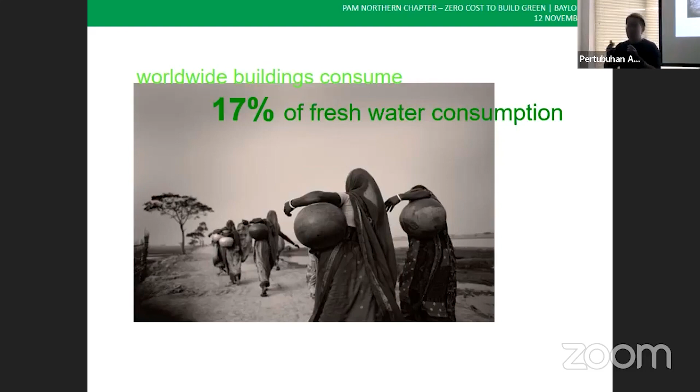Because worldwide, building itself consumes 17% of the fresh water worldwide, and it keeps continuing to increase. So that is the real fact. Continuing with that, 25%—that means a quarter of worldwide deforestation—is happening all over the world, including our country, okay?

During the WAD Architects Arena, he showed us the facts that the whole country, the government of Malaysia, we promised and we committed to protect the entire country's land, to reserve more than 50%, not less than 50%, forest reserve all over the nation. But the statistics show us that we are now actually somewhere around 50-something percent forest reserve, and it seems like it keeps dropping.

I don't know what actually you're feeling, but step into the jungle, look at the whole ecosystem—that actually is the source, how to say, the source of the entire ecosystem for the world. That is the fact always saying: if the Amazon forest collapses, that is the end of human civilization on the entire earth.

We need to protect the forest. We need to keep it. But yes or no, when we keep developing, we need materials, and wood actually is one of the major materials, and that is a real fact.

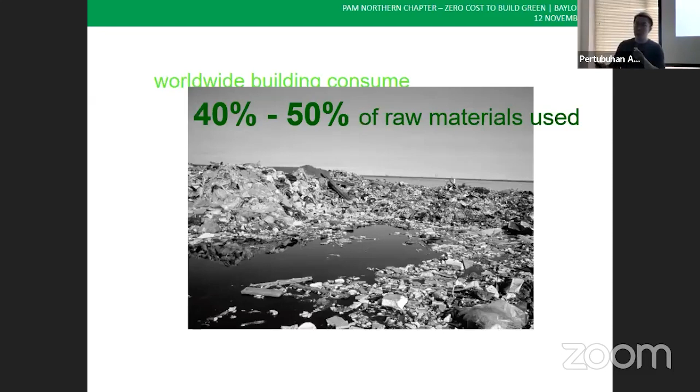Then when we talk about climate change, when we talk about global warming, we are talking about carbon emission. So the relationship between energy and carbon emission is very direct. The higher the energy consumption, the higher the carbon emission released to the atmosphere.

40%, yes, that is a real figure. Don't be surprised. We always talk about energy consumption. Yes, 40% of worldwide energy consumption is consumed by the building sector. That is a big number. That really shocked me.

Think about when we build green. Every single building can reduce half of the energy consumption. That helps reduce the total energy consumption in the whole sector. It's not only cost saving, but it directly contributes to the environment. This is not a small figure. It will touch even 50% of the energy consumption because of the population.

Two days ago I just read a news from the newspaper. In a week's time, the entire global population will hit 8 billion. The population keeps on increasing, and we need development. But how can we actually sustain it longer? That is something we need to think about, and I hope we can think about it seriously.

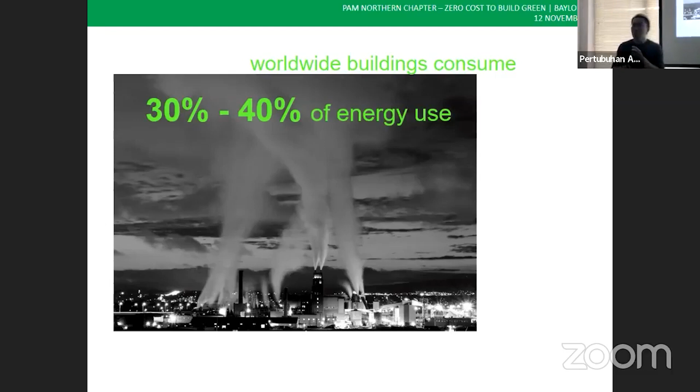40% of the energy consumption, I repeat again, 40% of the energy consumption is consumed by the building industry. And that makes this happen: one-third, 33%, of carbon emissions are contributed by the building industry. We keep having a very wrong perception that carbon emission is mainly because of transportation, driving cars, airplanes flying here and there.

No, don't go so far. Since today we are here talking about building, you and me, we are part of the building industry as professional architects. Try to focus on what's actually showing here on the screen: 33% of the carbon emission is contributed by the building industry.

How beautiful if we can design something green and sustainable to reduce the energy consumption, and that immediately reduces the carbon emission to the atmosphere. The relationship is very direct, as I mentioned. When we design a green building, it immediately reduces the energy consumption, and thus reduces the carbon emission. Whether that 33% keeps increasing or there is hope to decrease it depends on us as designers, the key persons in the building industry, as architects.

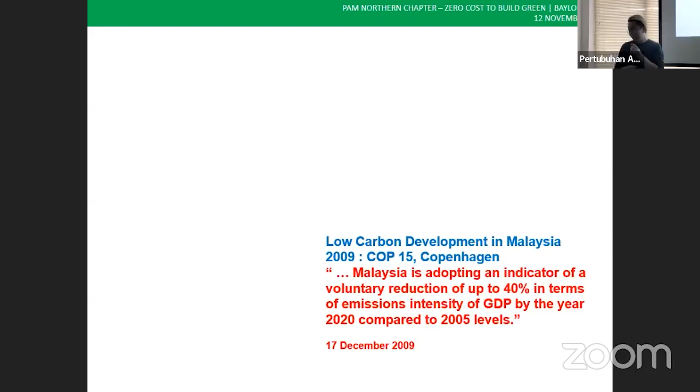Copenhagen 2009, so nice, okay? In Copenhagen, Malaysia, we do commit. We commit that, okay? When you guys look at this, you guys will feel so funny, but we are working hard on that. You and me, we are part of Malaysia trying to reach the goal. 2009 in COP15 Copenhagen, Malaysia adopted and committed to reduce 40% of the emission by 2020.

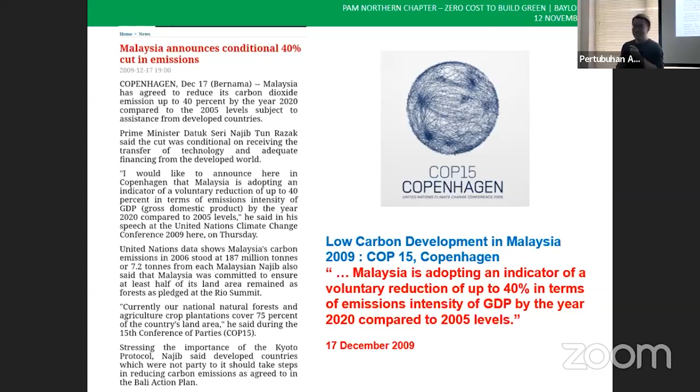So where are we now? 2022, have we achieved this figure, 40% reduction in emission? No. You know why? Because that was 2009, what Malaysia signed and committed to reduce 40% by 2020.

Then in 2015, Paris Agreement happened. Again Malaysia committed - just now it was 40% by 2020, but now in the Paris Agreement, we're going to reduce 45% emission for the whole country by 2030. Am I right? 2030, yeah. So 8 years from now, 45%. That's why I said this is something not only the government, but you and me, every single person, can actually contribute to reductions of the emissions for the whole country.

Try to imagine and think back what I mentioned just now - 33% of the emission actually comes from the building sector. If we can do well in the building sector, we can actually help reduce the emission for the whole country. As I said, temporarily, let's not talk about transportation or industry or other things. Today we are focusing on the green and sustainable development building industry. Let's see how we can do that. So by 2030, our commitment is to a world reduction of 45% emission.

So what actually is the Paris Agreement? It happened in 2016. The whole key point: out of 196 countries signed and committed worldwide for the Paris Agreement, we're going to cap the world temperature not to increase more than 1.5 degrees Celsius. That is the whole key thing for the Paris Agreement - we cap the whole world global temperature not to increase more than 1.5 degrees Celsius.

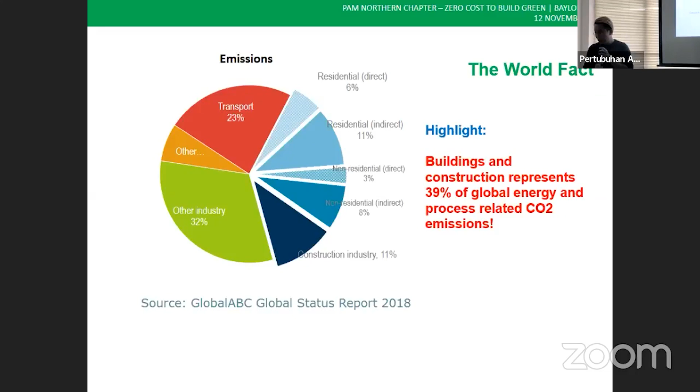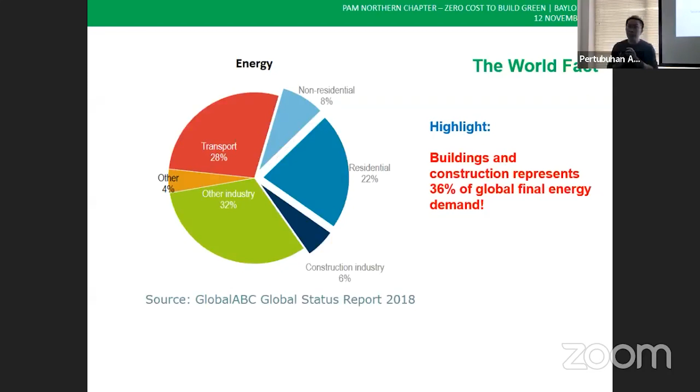So, world facts - again, what I mentioned to you, in more detailed segments and percentage. Building and construction represents 39%. This is the source in 2018 - 39% global energy and carbon emission by the building and construction sector. And building and construction represents 36% of the final energy demand. Just now I mentioned 30 to 40%, so that means it's correct - 36%, the percentage keeps on increasing, consumed by the building industry.

So the relationship, as I mentioned just now, is very, very simple - green building and carbon emission. When we design a green building, one of the main focuses is to reduce energy consumption, and that will in turn reduce the carbon emission to the atmosphere.

Every time I touch this screen, I like to ask my crowd a simple question, or maybe to the younger ones - do you guys know, who actually is the authority or the board having the power to generate electricity for Malaysia? Anybody? Which authority produces electricity in our country?

Yeah, TNB, you are correct, but no prize - thank you for your answer. TNB, yes, TNB for Peninsula Malaysia. Sabah and Sarawak have their own authority - Sabah is Sabah, Sarawak is Sarawak - to generate electricity. Okay, correct, TNB.

Then my second question: how does TNB generate electricity? That is a very key question. For a long time I've been educated, or I've been misled, that TNB generates electricity using dams, hydro. Yes, you are correct to think that, because I always thought, wow, we have so many dams all over the country. By having hydropower, renewable energy, we generate electricity by turning the turbine using hydropower.

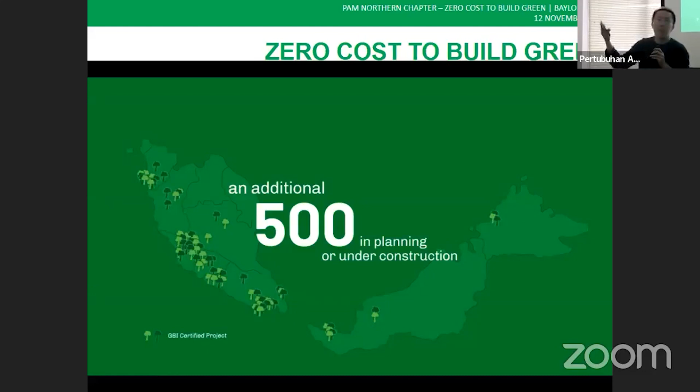So over the 1,000 green building projects certified under GBI, the total gross floor area - that's why I said we grew so fast in the green building movement. The total GFA of green buildings under GBI certified in Malaysia is equivalent to 67 Petronas Twin Towers. That is the GFA. Imagine how much green building we have in the whole country.

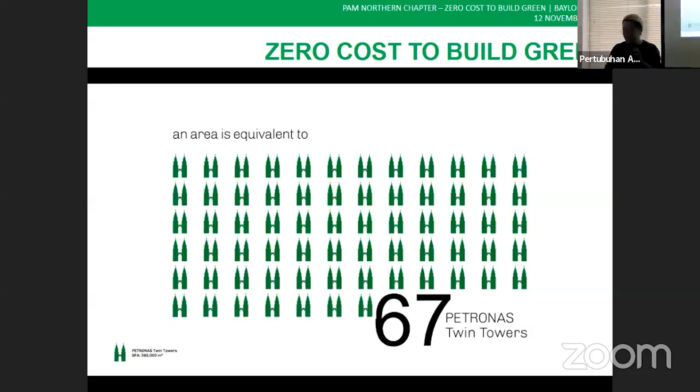And that actually reduces consumption by less 50% through all these green buildings. This is all real data from GBI after 12 years. And altogether, it means we reduce Malaysia's greenhouse gas emissions by 1.4 million tons of carbon CO2 per year, according to the GBI data.

And that is the conversion. There's always the conversion, how to reduce energy towards carbon emission - that's another deep study. But with that 1,000 over GBI projects, we successfully reduced 1.4 million tons of CO2 per year. So green building helps to reduce energy and reduce emissions to the atmosphere. So keep your promise to me: one architect, one green building. Go back to your project list, find one and focus on it, make it a GBI project, make it green, make it sustainable. That helps us and helps poor Mother Earth.

So now the main question to you guys: are green buildings expensive? That I'm going to share with you. After 12 years, through Green Building Index data and statistics, we show that to get GBI certified - just for your information, in GBI we have 4 different ratings: certified, silver, gold, and platinum.

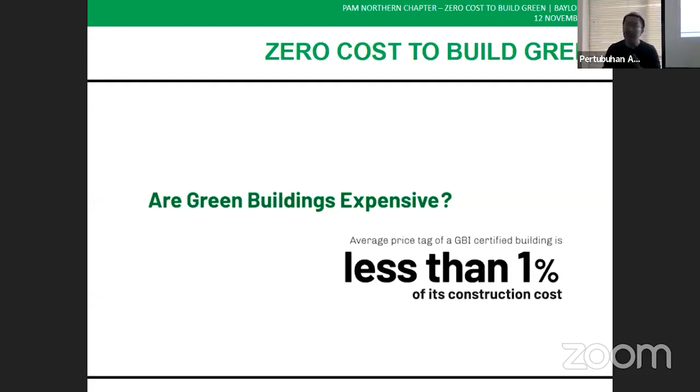It will be much more straightforward. But that applies to other tools also if the criteria is the same, okay? So then, now we go for it.

So, are green buildings expensive? Okay, then mindset tuning again. I like to do all this because after mindset tuning, then there won't be negative questions to me at the end of the session. Perception and reality.

What is the greenest building in Malaysia or in the tropical region? I always answer to my friends: Malay kampung houses. That is really the greenest one. With high roof, with big opening, elevated ground, with wood material, long sun shading, cross ventilation along the houses - all passive design, whatever we learned long ago in university. We accept all these passive design concepts that happen in Malay kampung houses.

And that is the greenest approach of green building in a tropical region like Malaysia. So what is expensive about building a kampung house? Perception and reality, am I right? You talk about green building - that is the greenest green building, and I don't see this as high cost construction. So it's always about understanding and perception, how we look at cost.

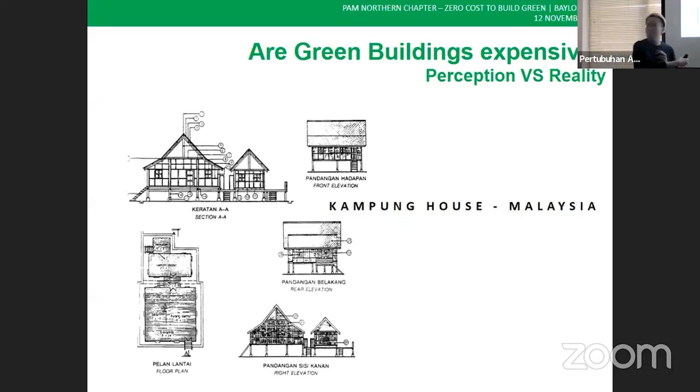All this helps to keep the building cool in the tropical region, okay? There are so many approaches for green building in different regions of the world. Since we are here today talking about tropical region, I always make a very simple principle: a green building in tropical region is always a cool building. We have to design the building as cool as possible so that we can reduce whatever is unnecessary, because I feel very cold now, the aircon is facing me - this is definitely lower than 24 degrees Celsius.

So something like that, which is not necessary. If it's cool enough, then we don't even need to rely on the aircon, am I right? I always like to ask this to the ladies: if let's say outside is thunderstorm, raining, very cold, will you still switch on the aircon at 18 degrees Celsius? Crazy, yeah, we wouldn't, okay? When we design a cool building, that is the best approach for tropical green building design.

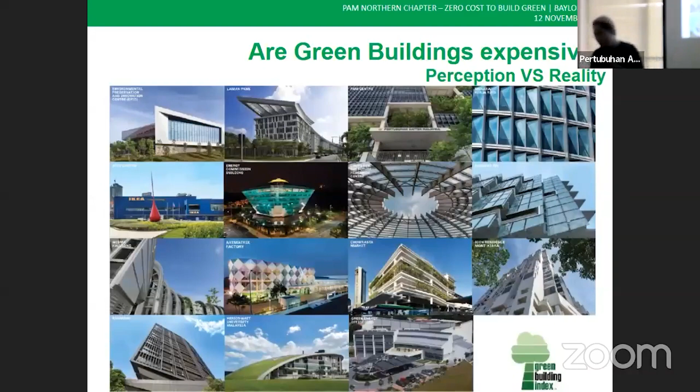This is not what I say. When we talk about green building cost, when you talk about dollars and cents, people try to understand how much green building can actually give back to us.

Our past chairman of World Green Building Council says that green building practices will reduce the building operation cost by as much as 9% or even more, depending on the characters of the building, and increase the building value by 7.5%.

Try to imagine, let's say you are the fake crazy rich Asian and you're going to buy a hotel, Hotel A or Hotel B. Hotel A is a very normal hotel without green approach, very high energy consumption. Hotel B is a very green project, where operation cost is low, energy consumption is low. Which one would you prefer? Definitely go for the green and sustainable hotel design, am I right?

A green building keeps building value. As a real fact worldwide, 7.5%. I don't know how he found the figures, but this is a statement from him. And I realize 6.6% increase in return on investment, immediate ROI for the green building.

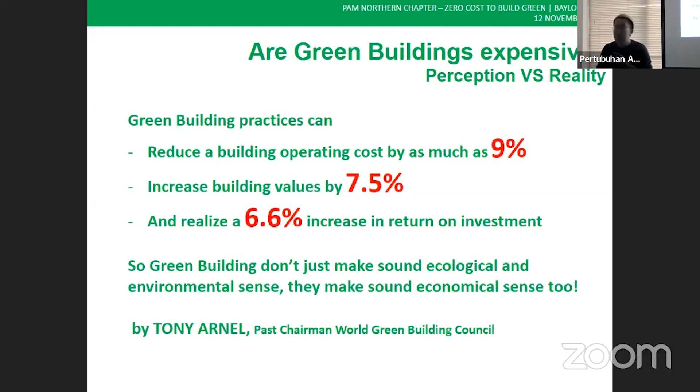So again, real facts. After 12 years of data, GBI can now share with us. We are collecting real projects - remember, over 1,000 projects submitted with green cost - then we tabulate it and it becomes a statistic.

For non-residential buildings, NRNC, the incremental cost for certified - again, not GBI Platinum, not GBI Gold, Certified, don't be so greedy, Platinum without cost can't happen - certified non-residential is 0 to 2% incremental cost of the total contract sum. I really don't see that 2% is a big figure, does anybody here disagree with me?

Baylon says 2% is a lot. I don't see 2% as a lot, right? But again, it's 0 to 2%, that means it can happen at 0.

So for residential project RNC, the statistics show 0 to 1%. So today I will focus on residential, how to make it 0 to 1%. If, let's say, at the end of the day I'm telling you, following my stage, my slides, it's 0.0 something percent - will you guys scold me or not?

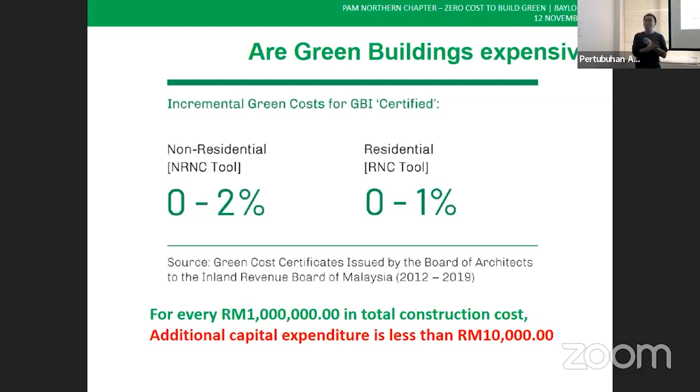When you go higher, technologies come in that make the cost vary. For a platinum building, we are only talking about 5%, provided architectural passive design is well superimposed in the design in advance. Don't tell me that without any architectural design - hello, okay, your facade facing east, facing west, I want this, I want this - without proper architectural design, it won't work.

No way, okay we are architects. We learn passive design, and we are so proud of passive design. Every time, I'm very proud of passive design because I graduated from USM. My lecturer kept teaching me about passive design. You know, I call architecture something like that. So we need to superimpose in design.

I hope you guys are very well known with passive design as well. Okay, so again today, I always say I am here not to teach. I am here to remind, as a gentle reminder.

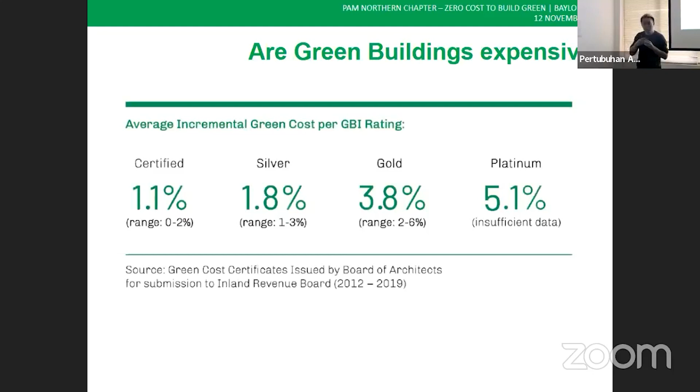In GBI, we have 6 domain criteria: energy efficiency, indoor environment quality, sustainable site planning and management, material resources, water efficiency, and innovation. GBI is a very comprehensive tool that covers every segment of green and sustainable.

Okay, so if you are a GBI Gold building, I salute you. GBI Gold building is the international standard of green building, very high standard. If you are a GBI Platinum building, you really can go for international awards. Trust me, no doubt.

So why do I want to show you guys this? This is to let you guys understand where the money goes for. If you want to reduce some cost, you don't want to spend much to create a green building, then you know that.

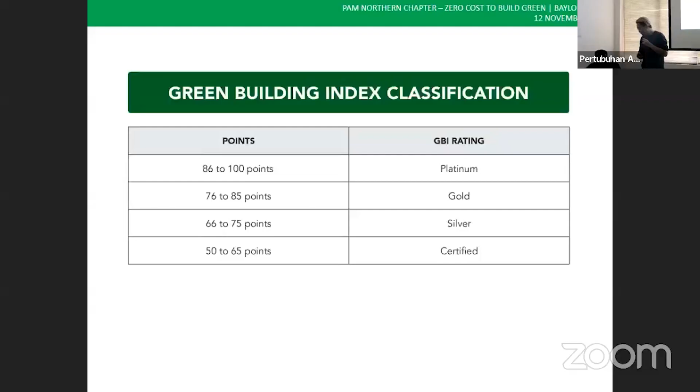Thank you, so yeah, just sharing with you guys. So this is the ratings in GBI. Just now I mentioned to you guys before, from certified, silver, gold, and platinum. Again, we are here targeting, talking, sharing, focusing on certified only.

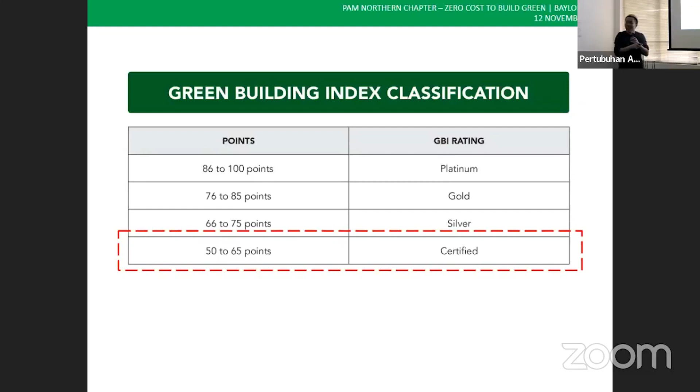When you get a GBI Gold, come to my office or come to Starbucks, we discuss. Okay, GBI is certified only. Concerned that over a hundred people out there are looking at me. So certified only, then residential building.

That's how we mentioned it, okay, residential condominium, not say condominium, high rise in Penang. Since we are in Penang, high rise residential. So this is a tool.

Look at the point score. Energy efficiency 23 score, indoor 12, site planning 33 - there's a lot of points inside we can actually try to get, and the site management. Material 12 points, water 12 points, innovation 8 points. That is the whole idea.

So that is the key thing with getting into the things already. So that is the whole score list. Subtitle, don't care because I will go through it in more detail in future. As I say, after today's sharing, you guys can submit your own project without Baylon. That is my intention.

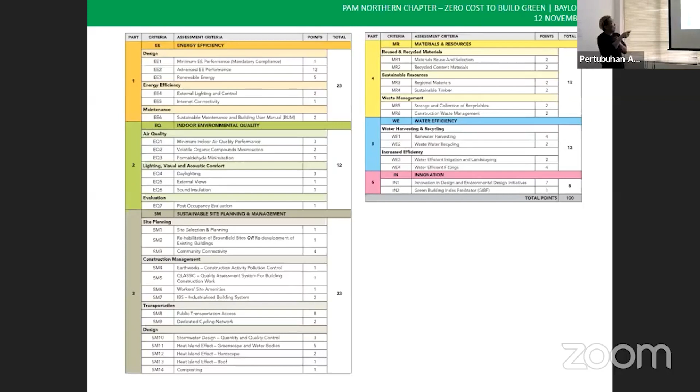Because everybody said, yeah Baylon, you take all the projects in Penang. No, I don't want to take. You guys do it by your own self, happy or not, without cost. So that is the whole idea of the 100 points. How it goes, doesn't matter.

So now, just now we said GBI certified, we need 50 score. How to get 50 score with the lowest cost or without cost? I categorize this into three big categories.

Again, all the Syarat Kelulusan in Penang, MBPP or MBSP. So the first one, UBBL and local authority approval condition. Second one, passive design and green approaches. The third category is sustainable good practices. By all these categories, you are GBI certified.

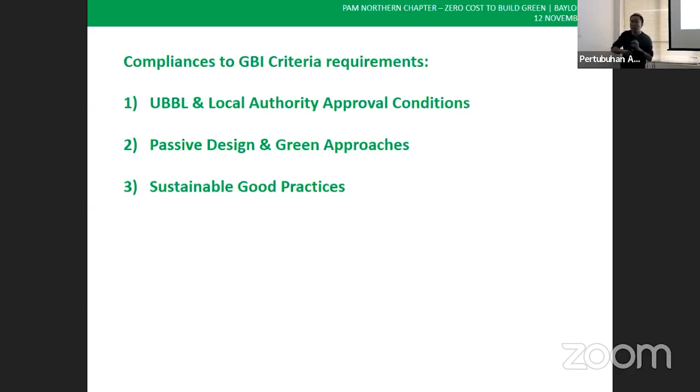Ready, okay, and you guys can stop me whatever in the middle of my presentation or challenge me, whatever I presented in the middle. Don't keep it for the last one, then there's no point for us to find back the slide. I prefer two-way traffic. Okay, so now the first one, UBBL and local authority approval condition.

By only this, yes or no, in Penang, whether you want to do GBI or not, because of the local authority approval condition and UBBL, you already have 20 score in your pocket. Okay, I don't want to go GBI, but you still have 20 score already because all these are approval conditions, all these are UBBL. We got no choice. You need to comply if you want your plan to be approved. So 20 score, what's so difficult?

So I assume all these 20 scores come without cost. Can I say so? Because it's the approval condition. Hey, don't be so unfair, you know. When everything about green, then you drop on me a whole green cost, green cost. No, this is UBBL and approval condition. What is that? So all these things, okay.

No worry, I will go down one by one. As I said, after today's sharing, you guys can submit GBI certified by your own self. I want to see more and more green buildings in the next year.

First one, okay, EE1. EE1 talking about OTTV, EE1 talking about roof U value. Sounds so familiar, am I right? All the BP submission now need to calculate the roof U value, am I right? That is a prerequisite under GBI. 1 point, okay, 1 point.

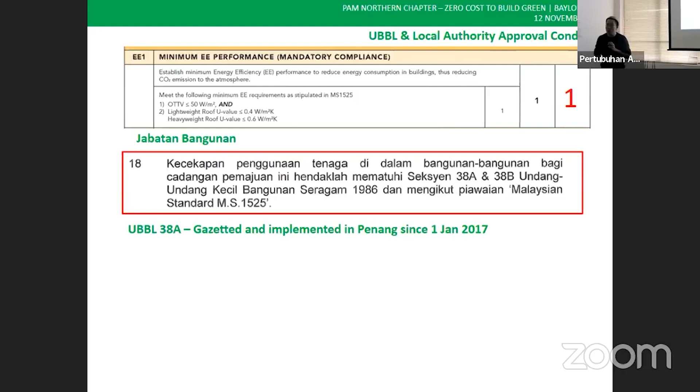So UBBL 38A got started in Penang since 1st January 2017. You guys need to calculate OTTV. You guys need to calculate roof U value with section since 1st January 2017. No choice. So there are two big major sections here: the OTTV and then the roof U value.

Let's talk about enforcement of OTTV. The requirement here talks about 50, lower than 50, then you can get 1 point already. So 4 things always put in mind when we do design. I even share with you guys the tips, after 12 years experience. If you guys follow my tips, I guarantee your OTTV can pass. So orientation, windows to wall ratio, sun shading devices, glazing spec. 4 things over here, okay.

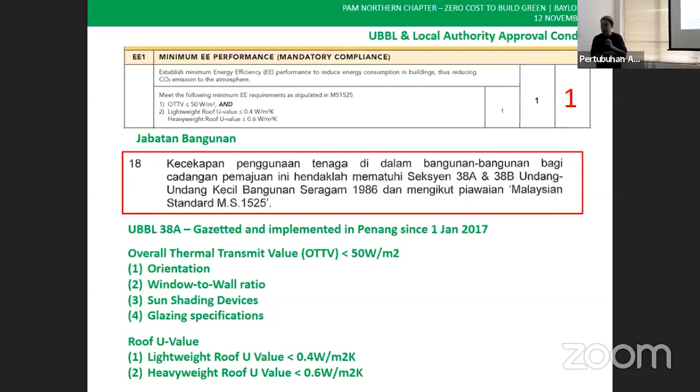Not at all, it's not because of GBI, but you do this, you can get 1 point GBI. So give you guys more information. I know you guys know how to calculate, how to comply — this is how to comply. Okay, I already shared the slide here.

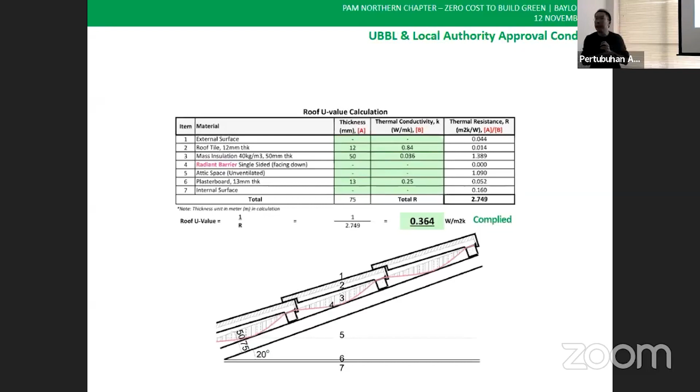Whoever has the stability, then we can put 1 layer of radiant barrier with 50mm thick mass insulation, then you can comply already — this is lightweight roof. So then this is heavyweight roof: concrete slab, then put 50mm expanded polystyrene, squeeze it, then you can comply heavyweight roof. I just give you guys some candies. You guys can do much better than me, I know.

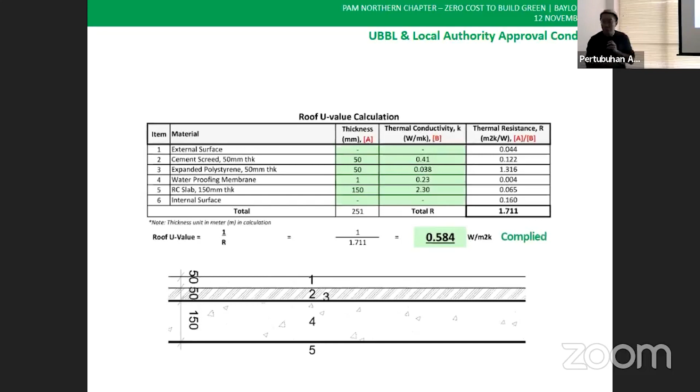So again, that is the details of the construction. But the sandwich between the whole roof, it's good to have a mass insulation then with insulation below. So that's the whole idea, construction-wise, yes. Okay, so we're done with the roof U value.

Now, this is the major part, how to secure your residential to be GBI certified. Look at the high rise part. We got low rise, we got high rise, look at the high rise. First thing, look at here: EE2 is still talking about OTTV, but it contributes 12 points out of 100 points. 12 points, you know — if you can secure all these points, then you can fly already. You get what I mean? You can fly already. So I don't be greedy.

Okay, for high rise, 9 points go for OTTV, 3 points go for roof U value. Usually roof U value just needs to comply. If the client has money, do it thicker, then you can get a higher score.

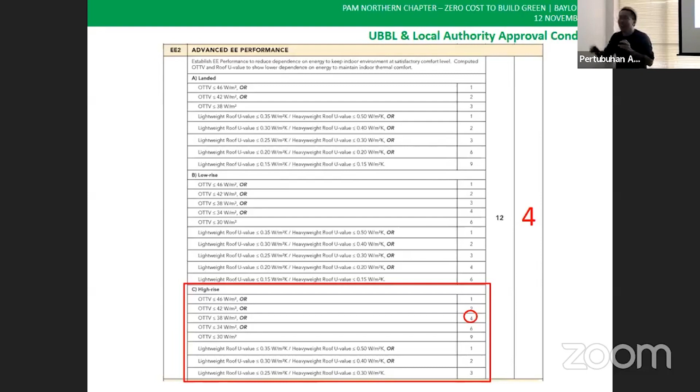In the 70s, you look at all those art deco buildings, then postmodern buildings - wow, fantastic! You look at the sun shading devices, am I right? I like Georgetown because of this, I can see the whole evolution of architecture. The sun shading from that long evolves to shorter, evolves to shorter, and then nowadays just a 50mm grouping.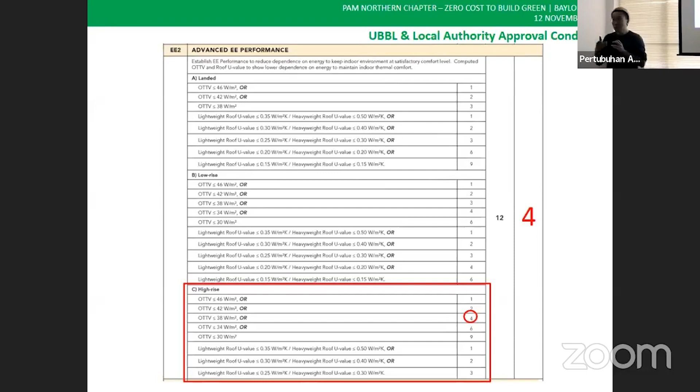So that's a question for everybody to think about - it is important, but no worry. I'm going to share with you guys, okay?

I want to prove to you guys, okay, not necessarily. Just now I said I want to get 4 points, remember? I wanted to get 4 points because I want my OTTV - I set a scale for you guys. You guys can go more if you have your own passive design, then more bonus points. I just want 38, 4 points, just 50 in total.

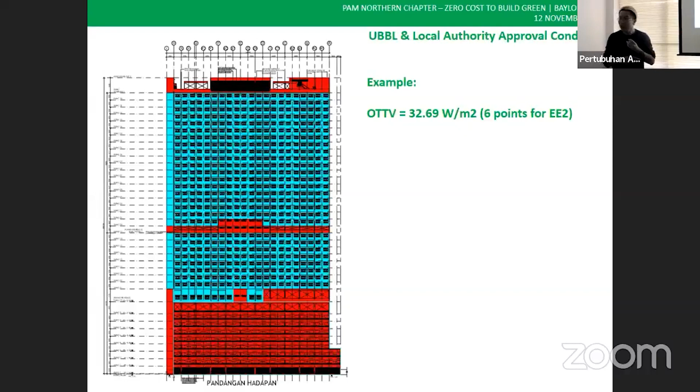So like this, the OTTV is 32.69. In fact, we can get 6 points. How come, Baylon? Exactly - the window to wall ratio. That's why I said there are many ways and hidden tips that you and I need to understand before we go for it, without big incremental cost. In fact, like this, I already got 6 points without cost.

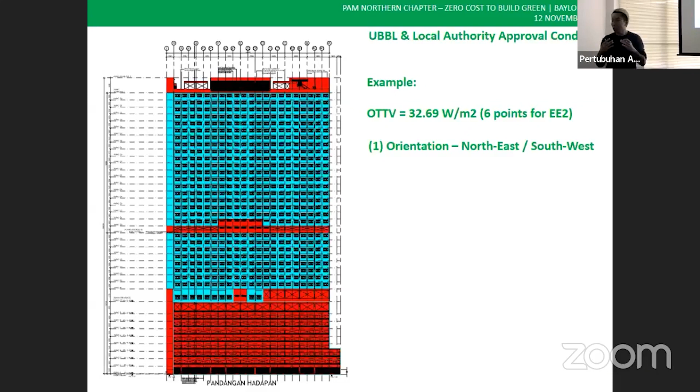Orientation - again, this orientation is not direct north-south, it's just twisted a bit, so that is northeast to southwest. If north-south, even better. So window to wall ratio, we need to understand WWR - it is very important. Two facades here: one facade has 32% window opening, the other facade, because of the lift core, reduces the window opening to 22%. This is the thing I want to highlight to you guys, and I didn't put it in the notes, so for those on the Zoom meeting who didn't listen, they missed it. Keep your WWR within 40% to 45%, then you are safe.

Again, keep your WWR window design at 40 to 45%, then you are safe. Now we are talking about lowering the cost - even for a condominium design, 40 to 45% I think is very reasonable, unless you're telling me, Baylon, I want to build a glass house or full height. Okay, full height, then next time all curtains.

Full height, very beautiful. Show to your client. Wow, this looks very modern, very beautiful. Next time, try a different color curtain on every floor. Full height.

So please, okay, try to think about keeping it 40 to 45%. Okay, this has 32.69 OTTV because the WWR is very low.

Okay, now please take note that there is no sun shading devices. If, let's say, there were sun shading devices, it would be even much better.

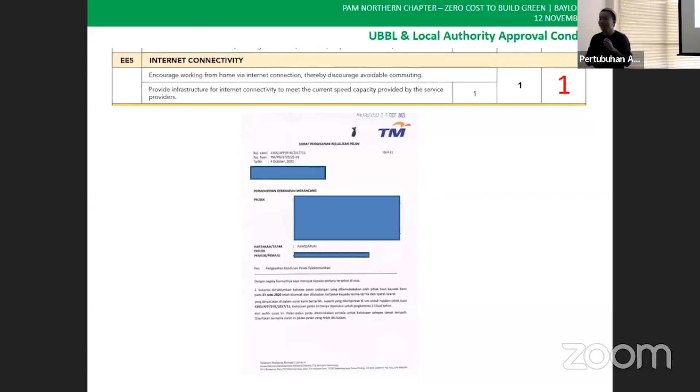No question to challenge me, huh? I love you guys. So third one, EE5. GBI should take this out lah, why put this in? You get the clearance from Telekom, then you get 1 point.

He says, provide infrastructure for internet connectivity, okay? We will put Telekom or whatever, TM or whatever lah, huh? Then I get it already ma. And it is a must, am I right? It is a must, I mean, for building permit approval - 1 point. I put what cost, project base cost - no cost, then you guys laugh.

Going for GBI is difficult? Where got difficult? Huh? Okay, this one.

Oh, okay, the internet actually helps us reduce a lot of unnecessary transportation. You see, that is interlinked. In the old days, if you wanted to buy anything or even work, you needed to travel out. Nowadays you can actually sit at your house and settle a lot of things with the internet. Frankly, it's true - so that reduces the emission.

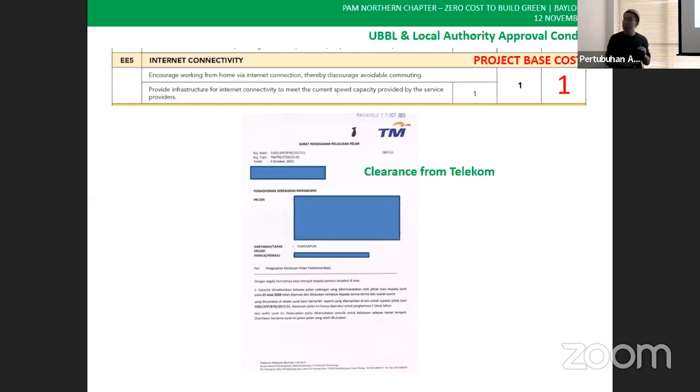Okay, now EQ1, now we're talking about indoor, okay? When you look at high rise, you will laugh when you see what GBI writes here - all habitable rooms to meet minimum requirement of ventilation in the local building code. Who don't know that? Who doesn't do that? Get what I mean? We all do that - remember 10% opening and 5% openable opening, ma? That is by law, ma?

1 free point. Got cost or not? No cost, am I right? No cost at all, because you need to calculate the 10% and 5% anyway - you need to do it for submission compliance. GBI difficult or not? No. I hope in the group chat many people said not difficult, not expensive. It's really not difficult and not expensive.

Then, okay, we go for this one - talking about cross ventilation. Then you need a little bit of a brilliant idea on how to make your design cross, okay? Then public circulation needs to be ventilated - why not? Okay.

So now the corridor. Usually we design the corridor with air well, both sides open. We will never trap our corridor design. If you trap your corridor design, it seems not normal already. So we open the corridor either both sides or one side with air well. That helps, that's already 2 scores in ventilation. Got cost or not? No cost. So I mean, GBI is not really difficult.

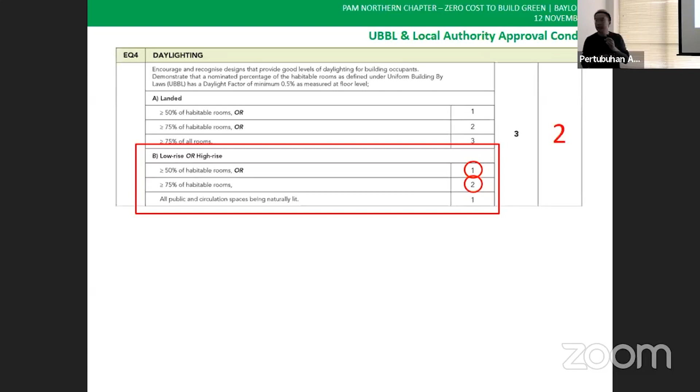Okay, so now the last point, public circulation. Back to the plan.

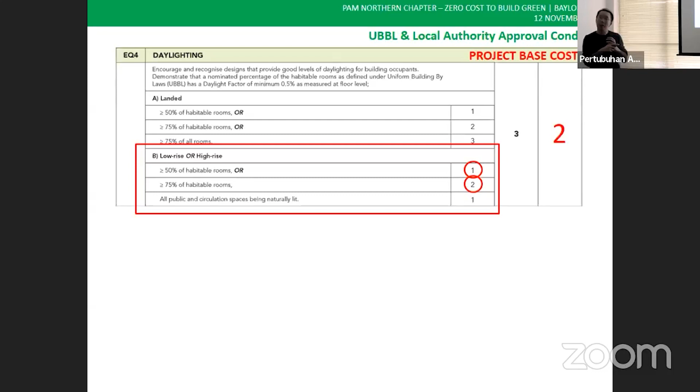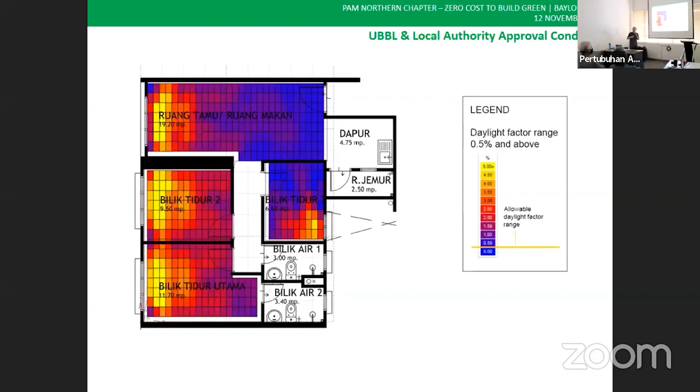Okay, so it's good, I like questions like this, that means you guys are interested, then I will see more green buildings in future. So now circulation space - central corridor for high rise is usually difficult to have sufficient natural daylighting, especially at the lower portions of the tower. Am I right? That's why we fail to get this point.

Unless, okay, you design it in a cluster, 2-3 units with one opening - it's one whole stretch like this. Usually we cannot get natural daylighting when it goes deeper down the tower. Yes, single sided corridor, then you can get 3 points. Where is GBI difficult? Am I right? Right.

So we have everything we need. That actually helps reduce unnecessary artificial lighting. When we go down darker, then you need your common lighting already. Okay, so let's do it quick.

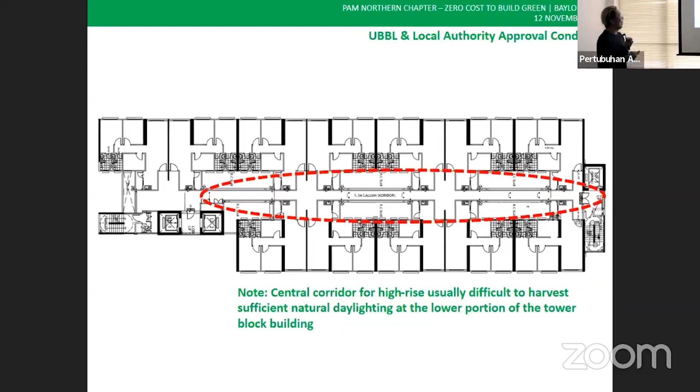I know you guys are very interested, that's why nobody explains it like me today. So when you go deep, you will love GBI, and you will love me too. Okay, this one I always say, take it out, take it out. You know what it is or not?

SM1 means when you get your building plan and KM approved, then you will get this point, because it asks you to comply with the Structure Plan. When you get your PP approved, that means you're already allowable to build at that site. You understand what I mean or not?

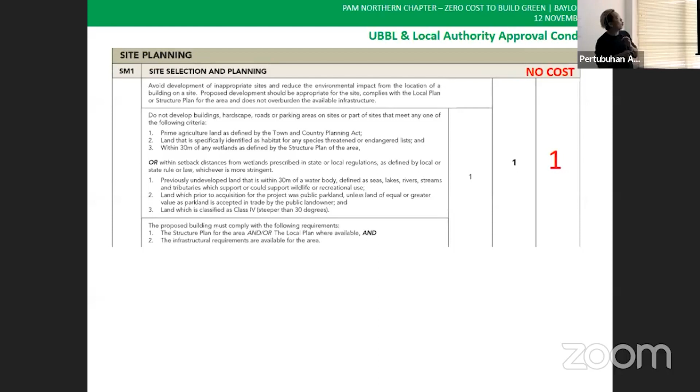So this is the site selection and planning. It's asking you to see how the structure must comply with the Structure Plan of the area's Local Plan. That means once you get building approval, then you automatically get a point.

What is the logic? The logic is to make you guys do it correctly, don't do it illegally, or challenge the council about developing hill land, something like that, because that is a site selection issue. Try not to do that.

So the next one, I know there's no C&S engineer here, but fellow architects and seniors, you guys are aware of this. You need to get approval for all these things. Am I right? 1 point, normal thing. You need to get your approval before you get your CCC. What's so difficult? GBI, zero cost.

Am I right? Okay, then worker site amenity. When you receive your PP, you will receive another attachment - how many workers can work, using this reference, there's cleaning of the road, then open area, then proper bunding, toilet with proper sewerage. This is all the thing. Proper sewerage, no pollution, no open burning, for better accommodation, hygiene, no mosquito, no dengue. That is standard practice under PP approval. So 1 point. Okay.

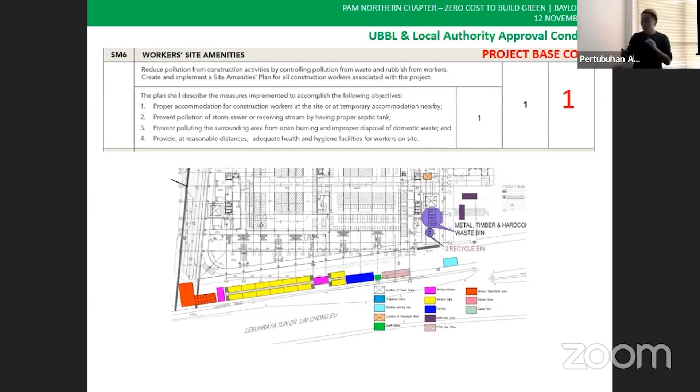Very good question. Okay, in GBI, precisely, you should drop that point if you're going to stop work because of this. To be fair, no point, no cost - you're going to stop work, then you still want to cheat my point? No way. So just do it properly. Okay, so 1 point, 3 points.

Then stormwater design. Whether you want to do it or not, you need to get your JPS approval. The C&S engineer needs to calculate the temporary detention, I mean the permanent detention, and the MASMA calculation. Am I right? So this is another part, but if you do much better than MASMA requirement, more than 30%, you get another point. MASMA already tells you the size of detention you need to do. If you want to do another 30%, then you get another point.

Then another one, this is more critical but doable. It's talking about your final discharge. Usually our final discharge has a trash screen, but the trash screen is a big one where everything can flow through - plastic, sticklets, whatever can flow through. If you do a very fine filtration system at your final discharge, GBI will give you this point because it reduces the pollution going to the ocean.

Okay, but again, you'll tell me it needs cost, but in fact that's a very minor cost. But since we're talking about cost, I don't put that point in, otherwise you guys will shoot me - you'll say no cost, no cost, or don't put it. We only put the basic one. Okay.

The final discharge - it's really little cost, right, Chairman? Chairman also says little cost. That means going green is not expensive. It is not expensive. But again, I try not to do that.

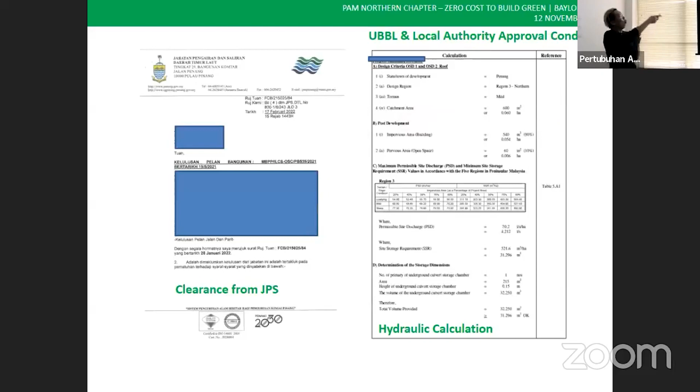Okay, we see how to get 50 score. Yes, now your JPS approval, your MASMA calculation - see, what's so difficult? Okay, then now Kawasan Lapang, look at high rise.

Okay, so this one costs a little bit of money, but not that much. The 10% is already a requirement, am I right, for Kawasan Lapang. In GBI, we only need 15%. Can you do a little bit more or not? You get what I mean or not? 10%, then I know you to do 15 - you won't see it, you don't calculate in depth, but the client also wouldn't ask what is between 15 and 10. You get what I mean or not? I just want you to get it at 15.

The authority already requires you to do 10% of your development size for real community greenery, you can put everywhere. 'Baylon, I don't have space' - it doesn't matter, do it in your pagar. If you do it in your pagar, then you're not counting the columns, whatever, you are calculating the wall area.

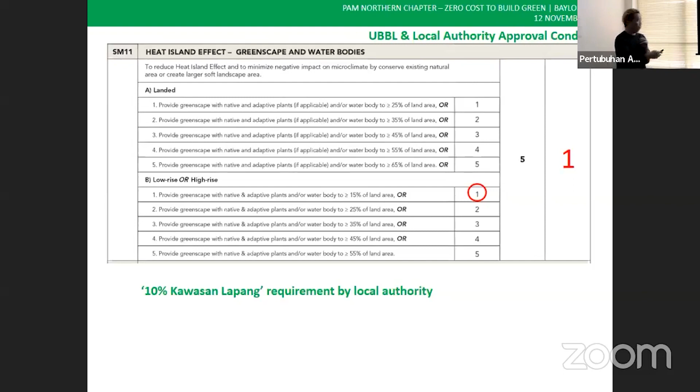That one much easier, with the length calculate 1.8 meter high, you see that area come out already. What's so difficult? If you don't do that in your pagar, you still need money to do the masonry work, I mean fence wall, am I right? Switch a bit, then gain the greenery area, then get the point. Not really difficult.

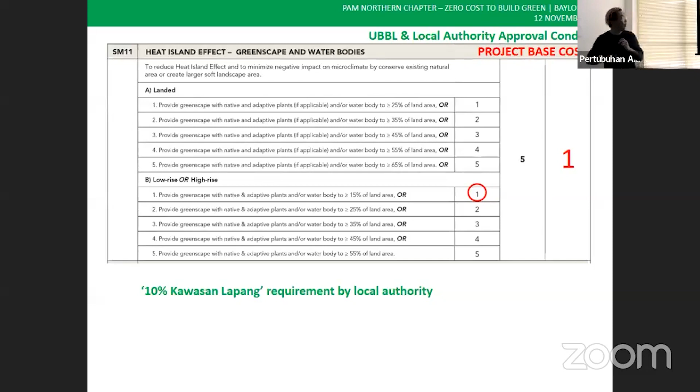Okay, then this one is talking about storage and of the recyclable. Yes, not only on that. It's counted, that means indoor greenery also counted, but real greenery I want to put a big carpet grass.

Artificial? Are you talking about green and tell me artificial? No, okay, real. Another thing I want to get more excited about, you guys make me more excited. Okay, you're talking about greenery and water body. Water body also can. What is water body? Swimming pool, that also can be calculated because this is talking about heat island effect.

Full greenery, real green, okay, and water can help to reduce the ambient temperature. Okay, wow, can see the road already, water body also can come, no cost, it's already built there. You get what I mean or not? So all the greenery plus the water body area is 15%. Okay, can you try?

Okay, now this one, storage of the recyclable. During construction, dedicate and separate the construction waste, one point. Okay, then during the permanent one, then have a permanent recycle.

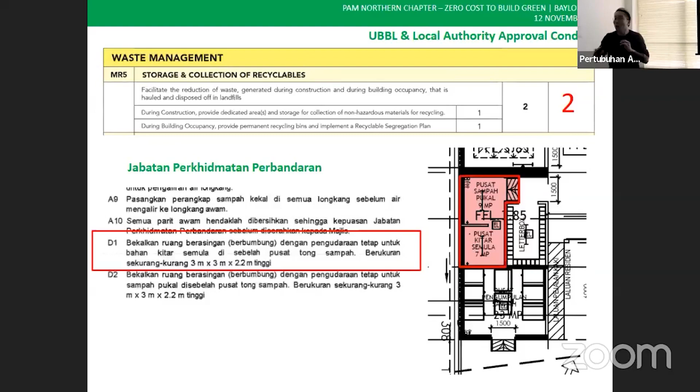Okay, simple like this. Then this one, MR6 construction waste management. So I don't even want to target the second point, just nice to hit 50% base point, okay? The Jabatan Bangunan already tells you to segregate, okay? Ask you guys to submit the report, ask you guys to submit what is the total things sent for recycle, am I right? Encourage the contractor, keep monitoring the contractor, do it correctly, okay? Then you can get that. If you guys are so keen to do so, you can actually get 2 points without any cost.

I got so many projects because I keep following - hey, this one cannot throw, hey, this one segregate, find the recycle and sell it out, something like that. So 2 points, no issue.

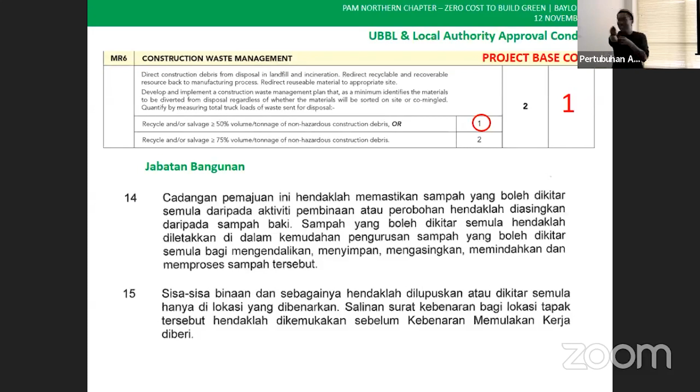Okay, so this is the form that you guys need to submit before your commencement of work, if I'm not wrong, am I right? The contractor need to fill in, then they need to estimate what is the wastage. I know whatever they submit is fake one.

Okay, I need to find a time, sit down with both local authority and see how to check on that, because all the form I see is all wrong one. Yes, they don't say one, all wrong. Okay, so we should do that because more and more rubbish is coming to the Pulau side already. Okay, find a way, as an architect, as a project SO.

Okay, water efficient fitting, this one also feels so familiar, right? Now this one I really want to highlight, allow me to talk louder. Okay, how many of you guys are concerned about this, since the building department also doesn't concern?

They didn't come and check what is the spec of your fitting, am I right? Your fitting lah, your WC lah, your shower, they don't even ask you to submit anything, right? It's all by your own signature professional that you will comply, am I right?

So now I please to you guys, my senior, comply with it, not difficult one. When the supplier comes to you, shows you the catalog, you tell them, I want to find the water saving fitting one. See your catalog, got the watermark one, like that one, that one I can use. Oh, without this one, I don't want, you take back, I want the water saving one. Simple like that, okay, so simple set.

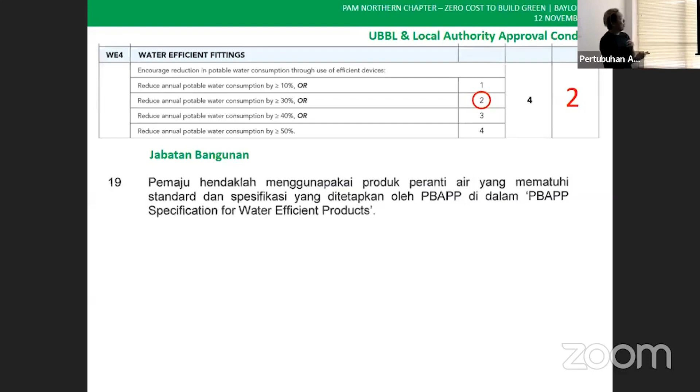Yes, they are, that's even much better. So in a way, to push saving in water, we have to run faster now. Innovation, this one I also don't know how to comment, but I need you guys.

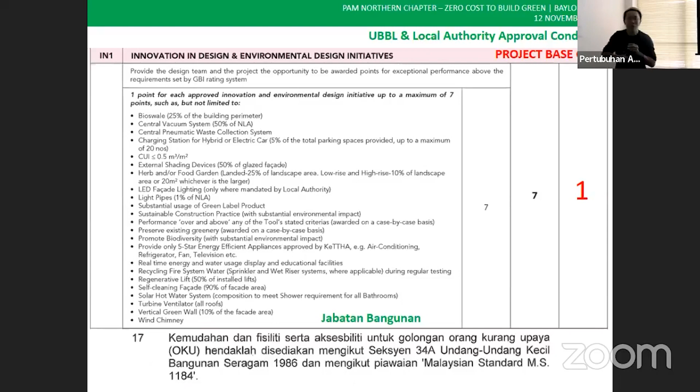I know PAM Northern chapter, frankly I really need to say thank you to you guys. You guys are pushing hard to make OKU universal design compliance and implementation much easier and easier to follow for Penang. This is really good. So in GBI under innovation, if you do the comprehensive compliance to universal design MS 1184, then you will get 1 point. Luckily Penang makes this a 'syarat kelulusan' (condition of approval), so concurrently you might get 1 point in GBI without no cost, because you need this to get your BP approval. Am I right? Happy, huh?

Now, with all those things that I mentioned just now, no cost compliance, we have 20 score in hand now. Is GBI difficult or not? No. Second question, does all this need cost or not? No. Thank you. So 20 points, no cost.

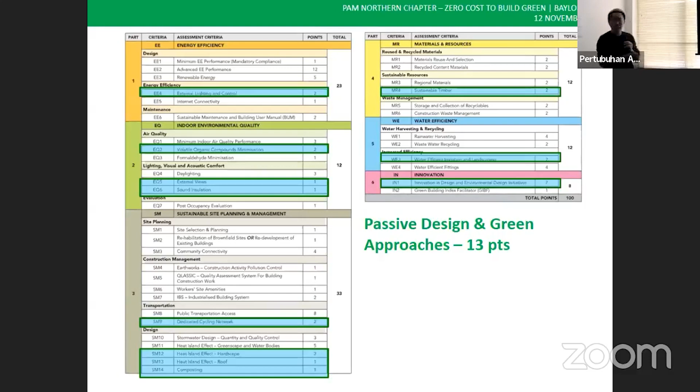Next is talking about passive design and green approaches. Here, another 13 points. Here you might argue with me now, this one needs cost, might only. We go through another 13 points. So, external lighting - I only want you guys to get 1 point. 1 point, okay, what is that?

We say provide high efficient lighting, okay, simple there, energy saving fittings at the common area. Okay, energy saving fitting.

Second one is to do it according to MS 1525 on the lux level. That means you don't need to design over-price for the common area. Question to you guys, can it be done? Surely can, because nowadays all the fittings are LED. Am I right? That is energy saving already.

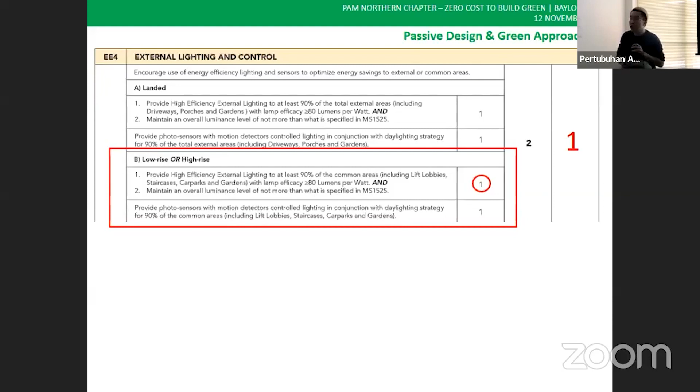So second thing is just get your M&E design, go and check MS 1525. This is stated clearly - where is the corridor? Corridor, not more than 100 lux. You design 100 lux for corridor, already sufficient, no need to design more. You understand or not? So does this need cost or not?

This is a green approach, this is a sustainable design. Sometimes you feel so happy when you know this. Then your M&E, how come you design so many fittings here? Saving, I need saving, have more. Then you feel more glamour, you feel more equal. So no cost, it's just a design. Follow the standards, just design according to the lux level.

Then volatile compound, VOC. This one even costs less. Paint nowadays, you see the advertisement, right? Low formaldehyde, low odor, low VOC. Now in the market, after GBI pushed through for 12 years, all the paint because of GBI changed to low VOC. That kind of VOC is the gas that will cause cancer.

I'm healthy, I eat healthy, I go exercise, suddenly get high cancer risk because of VOC release. It will slowly release for 3 to 15 years inside your house, slowly and slowly, every day you take it in, then that causes hazard to health. That is VOC. So nowadays, I don't want to use low VOC one, I want to use the conventional - but the conventional paint is even more expensive than the low VOC one now in the market. The old, very smelly one is no longer in production. Now it's all low VOC in the market.

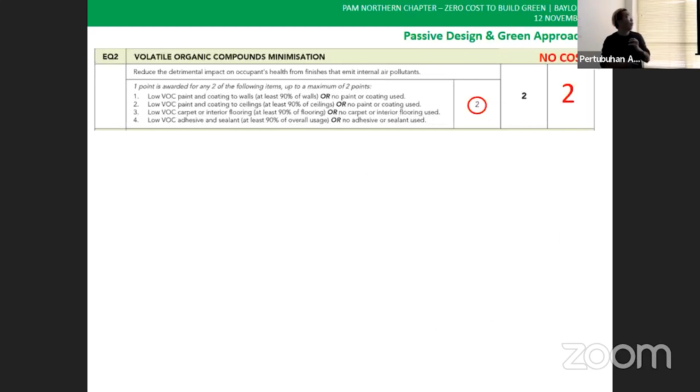External view - now this one, I don't know whether to say this is cost or not cost. There are two plans here, but I hope you guys, because this is passive design, just now I did mention already - if every single habitable area, even with a tiny window, can have a view out, it will be fantastic.

Is it doable or not, senior architect? Doable. How come every time the conventional design has the third room hidden, facing to the corridor with no view and no light? And you and me also don't want to stay in that room. Why give that room to people to stay? That's a joke, am I right?

If possible, this is something I really need to push in the market. I know, due to construction or normal practices or whatever, there must be a reason how you guys make this happen - 2 rooms facing out, 1 room facing in. But by the way, I really repeat to you guys, use your creativity. If possible, everything facing out, that is fantastic, like layout in tropical design. Something challenging and interesting to play around with. I believe you guys can do it. Can we go next?

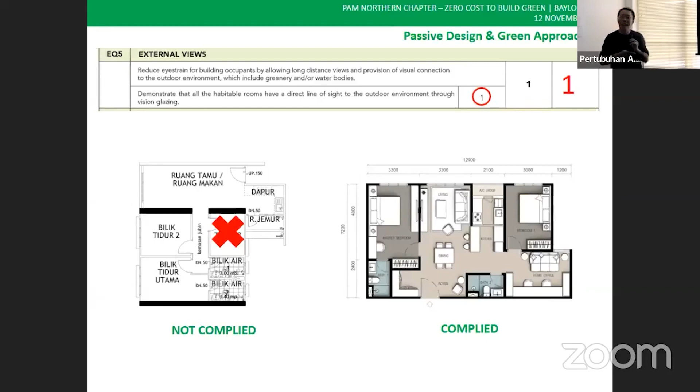This is design, no cost. This one also, I don't know why GBI keeps putting this here. This is talking about between units, between dwellings, soundproofing.

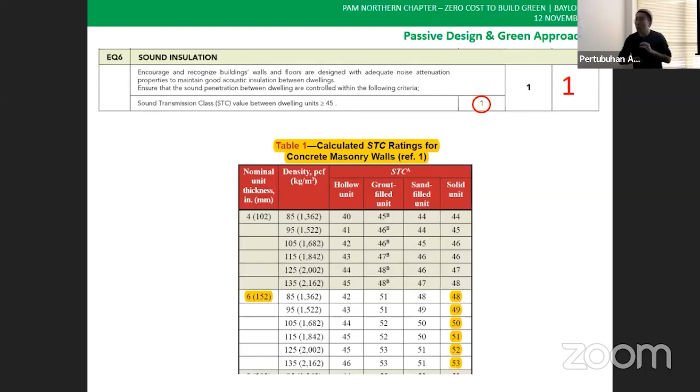135.135 - look at it, it says between dwellings the STC soundproof rating should be more than 45. That means the material can filter more than 45 decibels, something like that. From here my wall is 100, go over there minus 45, something like that. But you look at it - concrete masonry, 150, that is our normal party wall, or even our party wall is sometimes thicker than that. If let's say it's 152, that's already 48. You don't even need to do anything. That means your party wall already complies with more than 45 soundproof rating. You get what I mean or not? One point, no cost, happy.

Getting more happy, I want to see more building out. That is my purpose today.

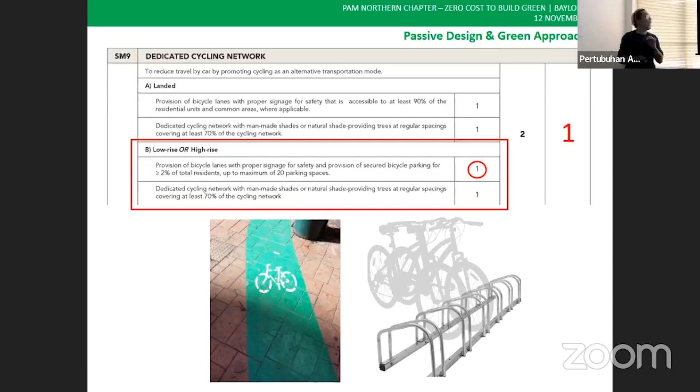Now, dedicated cycling. This one, somewhere here as a green approach, somewhere there as a local requirement, because nowadays MBPP and MBSP are asking you guys to put tempat letak bicycle. Am I right? So you need to put already. In GBI, what actually do we need to do? We need to do a maximum of 20 bicycle parking. Easy lah, 20 okay. And then put a bicycle lane from your entrance. It's not necessarily a lane, it could be a marking, from entrance to the bicycle parking. Simple like this, what's so difficult? What is the cost? Because that is also MBPP requirement. Just beautify it, plan it with a beautiful project. Happy, no complaint to me, can do, doable, next.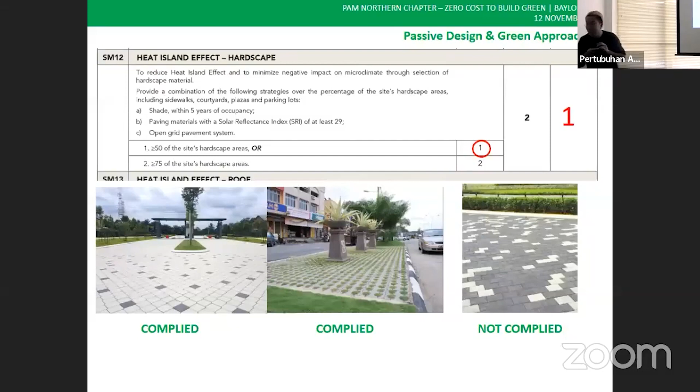Another 15 minutes, can or not? I'll try my best, okay.

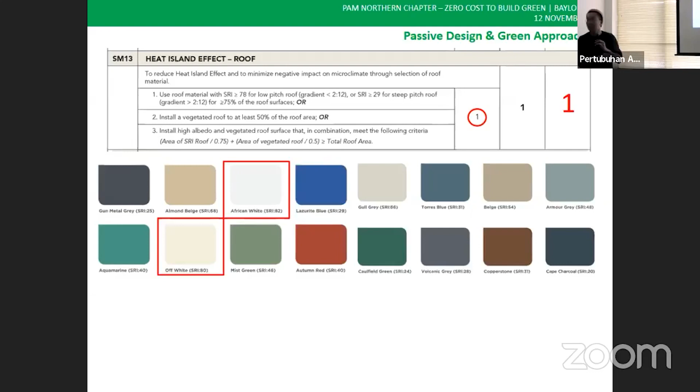So, colors of the roof. This is a roof, choose white color, it's the costless one. Before, you might choose dark blue, but choose white color instead, this is a no-cost option. It reflects heat.

Then composting. This one needs a little bit of money, a few hundred to a thousand. Buy a composting bin, put it inside your project, then you can get the point. This is a green approach, man.

Then sustainable timber. This is talking about what timber material is inside a house right now for normal construction. Usually only the door uses wood timber material, am I right? Unless you use hardwood floorboard. If not hardwood, it's only the door. So handle the door nicely.

Get the door with all these certificates. It's findable in the market and no cost, really no cost. Just make sure the source of the wood comes from a replanted forest, not just any forest—it's guaranteed to come from a replant forest, like the Malaysia Timber Certification Council. This is international, they come from replant forest.

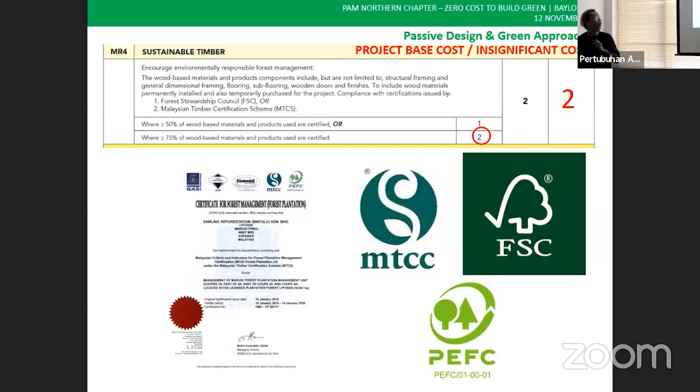So 2 points, then plant. How to get 1 point? You plant all native and adaptive plants, don't plant foreign plants. All the species should be native, because foreign ones need higher maintenance. You do all native adaptive plants, then you get 1 point. Simple like this. Who asked you to plant rose in Malaysia?

Some landscape architects like it, then green building needs cost more.

So choosing the plant is 1 point, no cost. Now this one, herbs garden, food garden — 10% of landscape area or 20 meters square, whichever is larger. This is landscape, so for me, no cost, because you need to plant anyway, it's just the species you choose. Instead of choosing other things, why not choose the plants? I mean herb species, pandan leaf, lemongrass, that people can use. Aloe vera, all this can be used back by the residents.

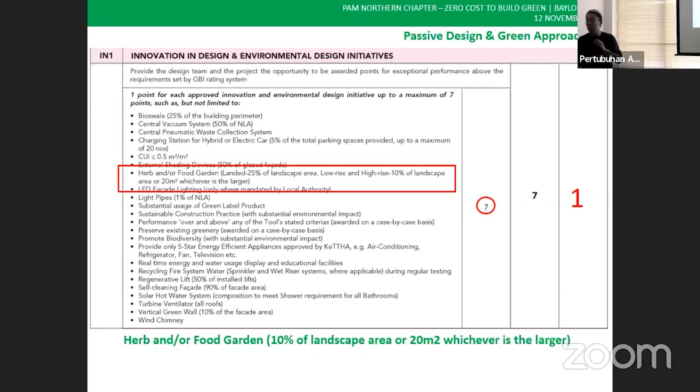So 1 point for doing this, another 13 points, so 20, 13, so 33. Another 17 points, but we are out of time. Very quick one, the 17 points.

So until now, still acceptable, right? Really no cost, we didn't see big cost. This one, sustainable good practices, even more straightforward. You look at it and see why GBI put all this. Common building with common management, definitely got common management — you need a maintenance room, maintenance tools, a building plan, done and submit one set to them. Simple like this, also can get all in GBI.

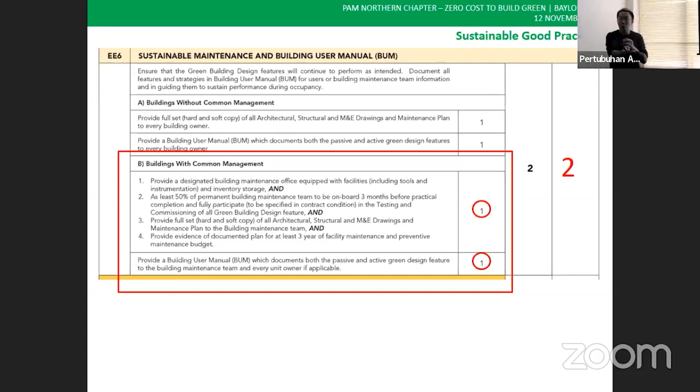Then you put a building user manual for them. That means you document all the green features and give it to the building maintenance team. They know what it is — water fitting is there, rainwater harvesting is that, something like that. Just document it, then give them a manual. Simple like that, it's all paperwork, so I don't see any difficulty here.

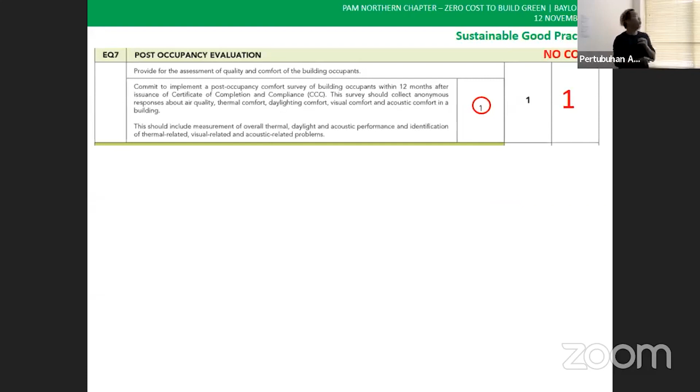2 points, so post-occupancy survey. When the building is done, the GBI facilitator or submitting person does a survey with the residents — how do you feel, is the lighting okay, is the temperature okay, is cross ventilation okay, something like that. Survey is 1 point. So what, no cost? No cost — just print the paper, do the survey, costs 2 ringgit.

So connectivity community, this one I understand. In the urban area like Penang, that's why I focus on Penang — our 4 points for network and community, easily we can get 2 points. Because some things that happen in your project: you have a playground or garden in your project, you have a surrounding in your project, you have your community center in your project, you get what I mean? Part of it is already inside your project. But this is again down to luck. So many projects I handle, especially in urban city like Penang, you can actually easily get all this within 750m surrounding your site.

So next, QLASSIC. Get the client to do QLASSIC, 1 point, fine. Any question or anything? This is also another interesting part — if you do QLASSIC, that means the workmanship of the project is good, which means future defects are minimized. Good for you as the architect, good for the client's reputation, good for the contractor to finish the work. Am I right? So I don't see any bad thing about QLASSIC, get them done.

Yeah, on the prelim, no. But if we look at the deep charges compared to the future defects, how do we weight that? So I do believe, upfront, do that, then the whole project is safe.

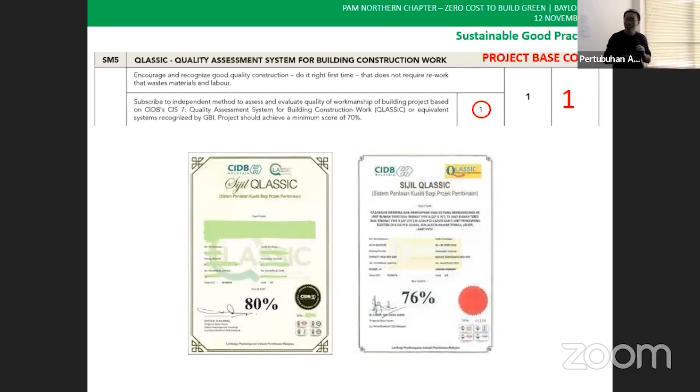Okay, public access. If nearby, say within 750m, you got a bus stop with more than one route - 301 or 302 also come, 111 also come - then you can get the point already. How about no bus stop? No bus stop also never mind, then provide a shuttle to the nearest bus stop. It is good also, but how much does this cost?

Rent a van - ask the client, ask the management, rent a van. If you need this, that means you are very isolated already on the project, you get what I mean? In Penang, really easily you can find one, two, more than 2 routes. 4 points - all these basic points.

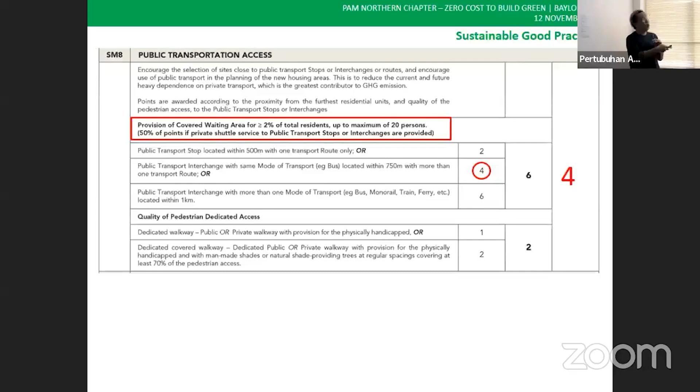So 3 points. Then recycled content material - this one is difficult to explain, but simply said, steel is a material made from recycled material, that's called recycled content material. All the steel in our country is recycled content material because they don't take the iron and come make the steel - they collect here and there and then go and melt it to become a new thing, something like that. So that is what happens in our country.

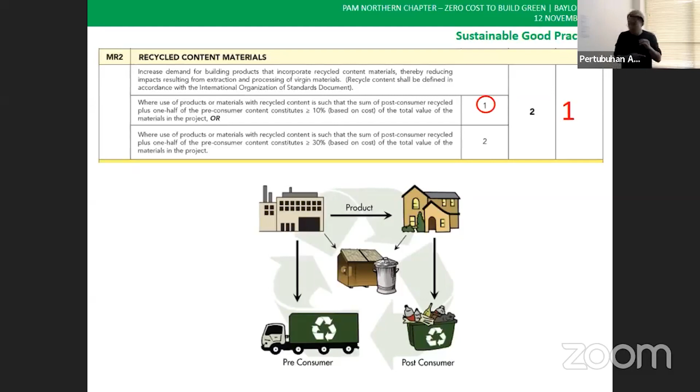Then next, regional material - this one also really, made in Malaysia. If you make in Malaysia more than 75%, more than 2 points. Surely, am I right? Because it's talking about the project cost, the material cost. All the expensive things - the steel, the concrete, the cement - usually are made in Malaysia, am I right? All these things easily help you get this 2 points already. And even a better project cannot get this 2 points after 12 years. Okay, correct me, so happy everybody now.

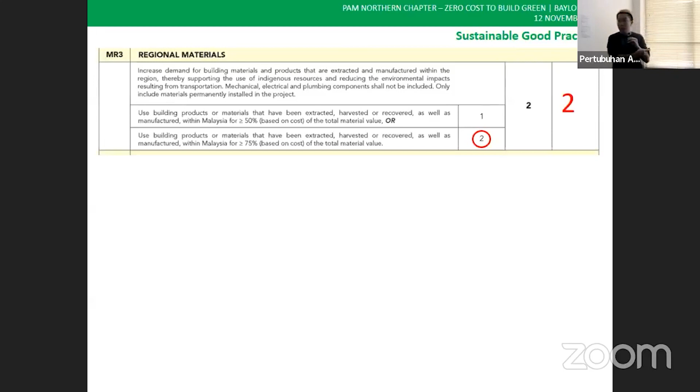So now, concrete usage index - what is this? We know concrete is not an environmentally friendly material because we need it from the batu kapur or something like that, the whole process. We try to reduce the concrete usage in construction.

So not more than 0.45 meter cube per meter square. That means the total volume used in the project - how many volumes of concrete used divided by your GFA meter square. This is how the calculation is, simple like that. Total meter cube divided by meter square - total volume of the project's concrete usage divided by your build up area.

Not more than 0.45 - sometimes yes, sometimes no, I cannot tell you. But if you put this design parameter to your C&S engineer in a very initial outline, they can design for you. When they do the design, they will try to control within this. I don't think this is under architect scope, but we put the design parameter for that.

So 1 point. Then provision of water sub-meter for leak, because this one is easier - even now, normal times, we will put a sub-meter. Am I right? Swimming pool we will put a sub-meter, bomba we will put a sub-meter, and then common area we will put a sub-meter. So if let's say you got more usage, you put a sub-meter for the landscape one too. I know.

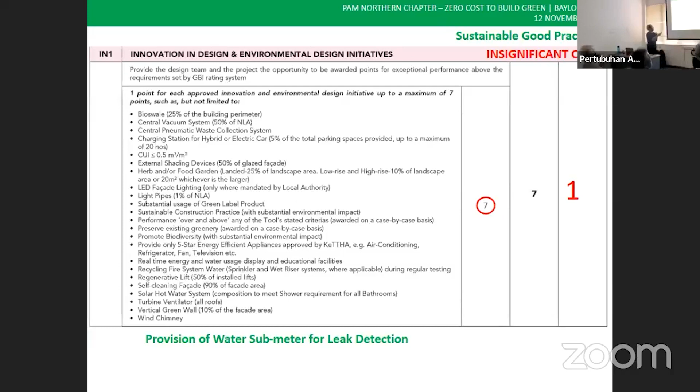So then the very last one, this one, appoint a GBI facilitator.

Hey yo, you all hey yo.

I think after 49 points with no cost, this is the only point with a bit of cost. Pay enough lah, I talked for 3 hours, okay. Just a joke, okay. So you all can become a facilitator, okay.

And again, GBI can accept a project submission even without a GBI facilitator. You just need to take out this point here, and you get other points. So if you're familiar with submitting the document, it's simple like this. So with this one, we are at 50 - we are GBI certified.

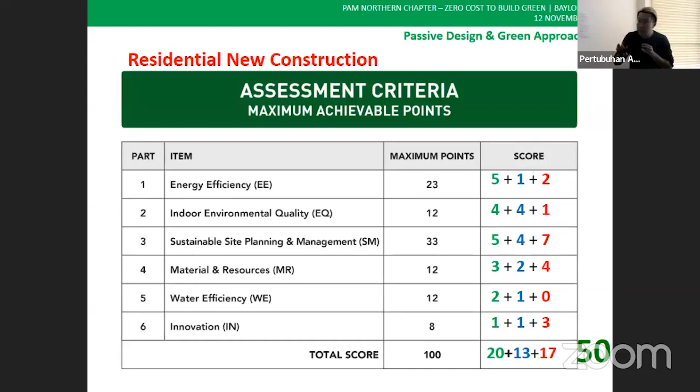So I need you guys not to give face to me. I hope you agree with what I presented just now. It's no cost and very minimum cost according to Penang conditions - the syarat-syarat kelulusan, our urban area condition. Am I right? Residential, GBI certified, 50 score, high rise. This is how we do it in Penang. Going green is not expensive. I hope you guys agree with me. Okay, so I end my sharing today. Thank you very much.

Thank you, Baylon, thank you very much. Maybe a quick one, let's see. There's a question here for Baylon, I suppose. Baylon, what's the difference between GBI and MyCrest? Yeah.

Okay, some questions about GBI and MyCrest. I mentioned to you guys, MyCrest is created and owned by CIDB. In fact, in the very early time, GBI worked together with CIDB to build MyCrest - not to build it, but to assist them in forming the tools. The only difference is that MyCrest handles JKR buildings. It's very rare that MyCrest is submitted by a private project, but of course private projects can also submit to MyCrest. The only additional thing MyCrest covers is the carbon part.

That's the only difference. But again, I still hope the architects will promote GBI, since GBI is an international tool owned by Green Building, and GBI is so comprehensive to cover all the aspects and criteria. Okay, so far, any more questions from the floor?